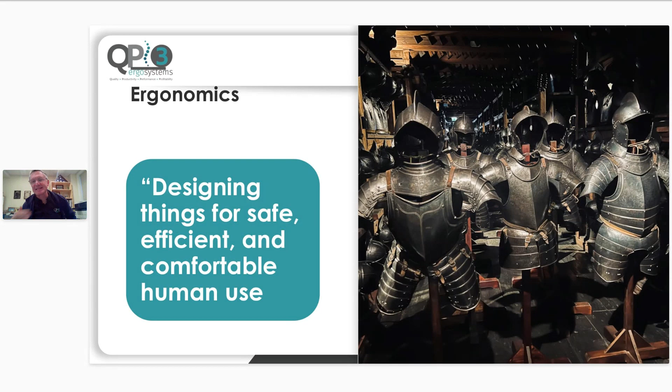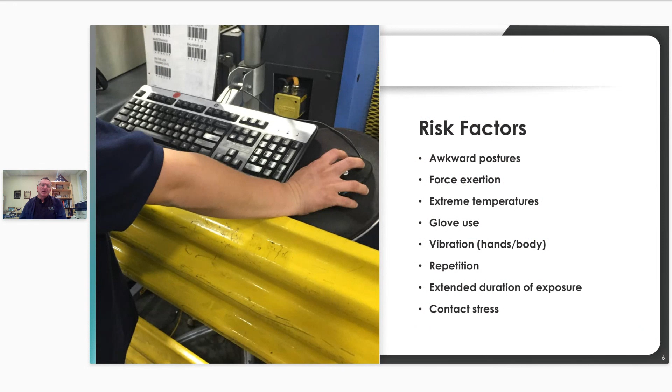But again, they were at least thinking about ergonomics and the sizes of people way back then. We'll talk a bit about risk factors. We're dealing with awkward positions, and that's one of the big challenges we're seeing with ergonomics - it's more of a posture issue. You see here, they've got extended reach, awkward posture, wrinkles in the wrist, contact stress along the edge. This is not a good setup, so we want to be concerned about this.

I like to talk about this whenever we get the chance, because the financial impact is pretty great. We look at the average case cost, about $25,000. The deductible for most people's workers' comp policies is about $250,000. So that means most ergo cases don't hit that deductible, and that comes out of the company's pockets. You got to find the money somewhere - money doesn't grow on trees. It comes out of an organization's profit margin. So if your organization has a 10% margin, you have to sell another $250,000 worth of products or services to earn the money to pay for that one claim. That's really important to keep in mind.

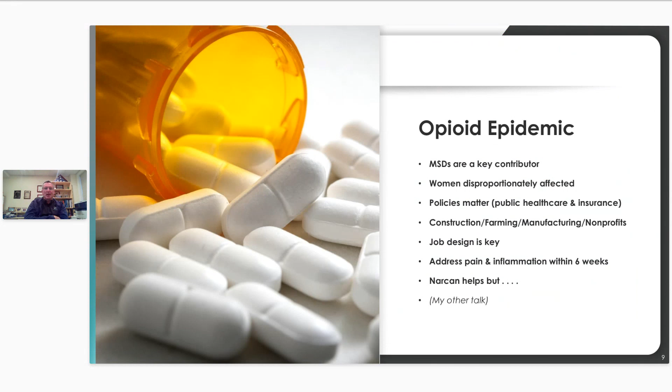If we start looking at the opioid epidemic, we see soft tissue disorders as key contributors. We see more women affected. We see public healthcare policy incentivizing healthcare providers to manage pain - they're financially incentivized, because the better the pain scores, the more money they get reimbursed. So it incentivizes healthcare providers to actually throw more painkillers at people, and that's a challenge. That's a whole other talk.

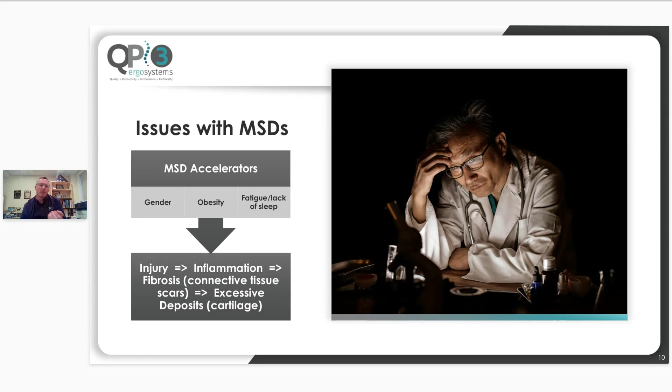We have lots of issues with MSD accelerators, such as gender, obesity, fatigue, and lack of sleep. Again, I talked earlier that women are more susceptible, and I'm not sure why that is, but what we're trying to do is protect the people. We want to get ahead of things.

Now, in the U.S., there are several ergonomics requirements, believe it or not. Federal OSHA has what's called the General Duty Clause, and that's sort of generally written, but workplaces are required to address recognized hazards - i.e. if you know people are getting hurt doing this job and it affects the shoulders, then it's a recognized hazard. You need to do something about it.

Minnesota has a new ergonomic standard that just went into effect at the first of the year. It affects healthcare facilities, warehouse distribution centers, and meatpacking and poultry processors. Warehouses and meatpacking and poultry processing are at a 100-employee threshold, but healthcare facilities don't have that 100-employee threshold, so got to make sure of that. If you're in any of those industries, let me know - we can help you out. If you're in Minnesota and have those sorts of operations, it's really important to consider.

California is a whole other world. You've got the Injury and Illness Prevention Program standard, requiring companies to conduct assessments of all claims-related incidents. So whether it's ergonomics or not, if somebody gets hurt and you're not doing an assessment, you need to be. They've also got an ergonomics program standard for general industry - it's about a page and a half.

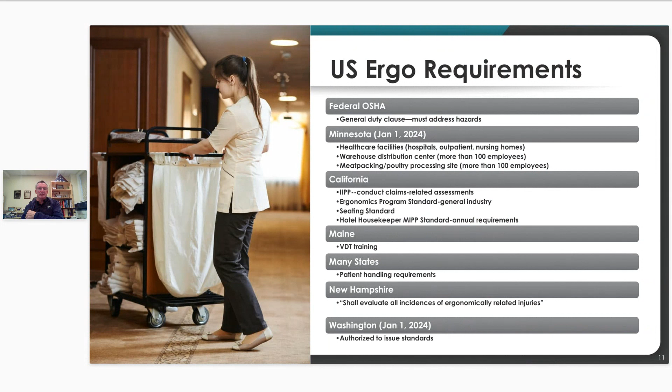But it's not just in the U.S. that we see this stuff. Brazil has ergonomics requirements, and the interesting thing is they're based on your gender and age. They also have specific material handling requirements or limitations. Mexico requires everybody to do assessments, find the risk factors, and look at material handling.

In the UK, their ergonomic standard or efforts are focused mainly on computer workstations. And the European Union - I've done a lot of work overseas - is making sure that hazard assessments of jobs are completed for all jobs, looking at safety, machine guarding, ergonomics, and industrial hygiene. I did a lot of work back in the day, in a prior life, in the EU, and there's similar requirements around the world.

Some of my coworkers said - she put it pretty well - some of my best work paid vacations. We had some time off, generally if we were doing a longer trip, and we got to explore the area. If you're ever in Sydney, make sure you go to the Museum at the Rocks. It talks about how the prisoner ships were brought in and some of that history. I'm a history buff, and it's really cool.

All right, so let's start talking about job rotation specifics. Smith in 1981 said a change in task is comparable to taking a break. Well, yes and no - we have to think about it. We're going to look into a little bit more detail.

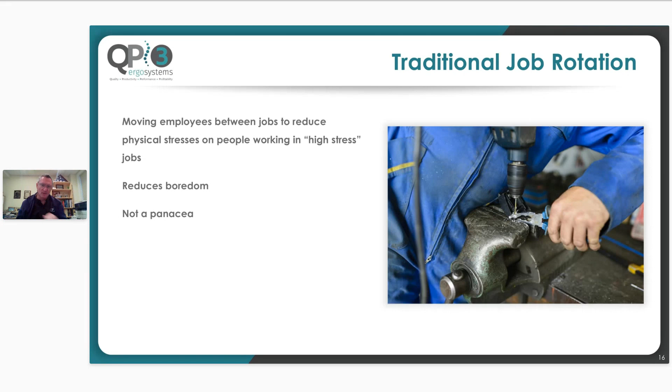The challenge is it's not a magic wand. Actually, I've been looking for that magic ergonomics wand for a long time and haven't found it. When the Harry Potter books and movies came out, I thought we were there, but no luck. Anyway, there's no magic wand.

So the challenges we see are we have to use a different part of the body if we're going to be rotating from one task to another, and we have to rotate frequently enough. Now, job rotation isn't just for physical issues, it's also for cognitive issues. So if I have a very highly visually intense task, I need to rotate a lot more frequently from a cognitive standpoint. Think about it the next time you're standing in a long line waiting to get through airport security.

Those are the screeners, a highly intense visual task, high stakes as well. You'll notice they rotate about every 30 minutes. Sometimes what we're finding from a fatigue failure standpoint, meaning wear on tissues and joints of the body, is that a high risk job can sometimes still be too high that we don't want to move somebody through it.

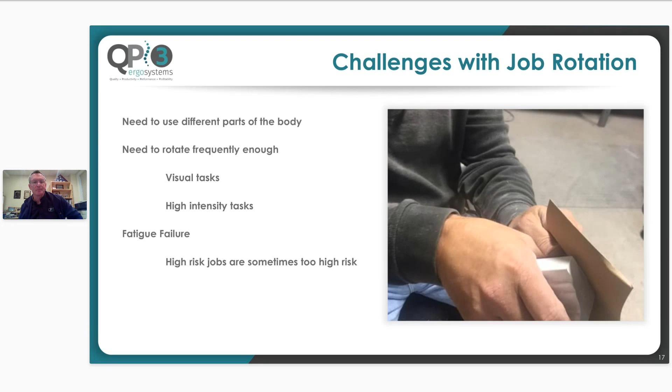Let's see if we can get this to play. There's the Tacoma Narrows disaster in the 40s. It's not playing, I was hoping to get the video to go. That's not working for us.

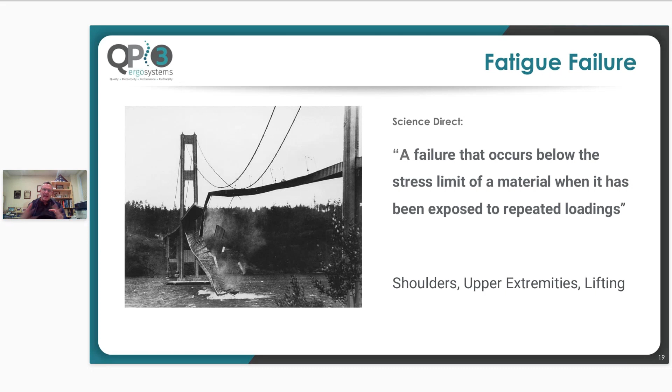We generally see this in the shoulders, upper extremities, and with lifting tasks. There are a few tools out there I've been working with that help us look at what's going on in the body. In the bridge example, we're looking at an inanimate object, but with the body, researchers were looking to see whether the human body would be subject to the same kind of fatigue failure. They did a lot of studies using lab mice, rats, etc., and then with living organisms.

The challenge with rotation is, as we talked about, rotating people from a low risk job to a high risk job. Say we have three jobs: one very high risk, one medium risk, one lower risk. We have to look at all the jobs in the cycle from a fatigue failure standpoint. The challenge is that since the damage is exponential, not linear, even though we might rotate someone from a high risk job through two lower risk jobs, at the end of the day we might still bring that person, instead of just one, into high risk for injury or illness.

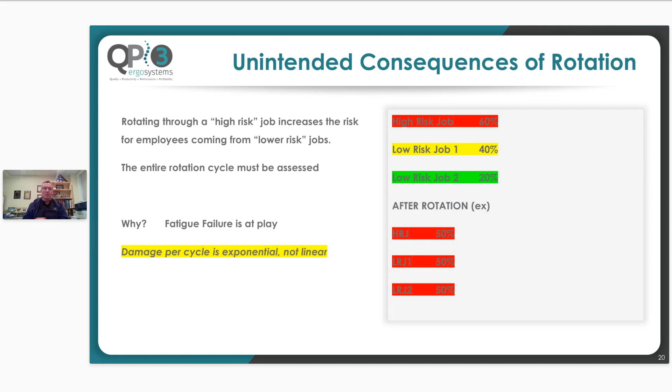That's a challenge. I think that's what a lot of folks are missing with job rotation, they think we'll just do job rotation and be done with it and be fine. No, you can't do that. You just can't use that as a panacea.

Here's some info on a job I reviewed a couple of years ago, doing a horizontal push-pull. It was about a 45-inch lever arm, reaching 45 inches to make an 11-pound push of a tote across the conveyor to a takeaway conveyor. What we found is the actual order of magnitude of risk for an injury requiring medical intervention within a year's time was over 90%.

Sometimes when I get a chance in class, I'll mock up this job and let people think about the effects on the body. What we're getting here is that extended reach, because they're pretty much laying the totes across the conveyors. Ironically, these are full totes, but in the picking operation, since it was a fulfillment job, the empty totes were being pushed onto the conveyor where they're picking by mechanical means. So they already had the technology and equipment, they just weren't using it to help once the person was done picking that tote. That was pretty fascinating, and a little frustrating as well.

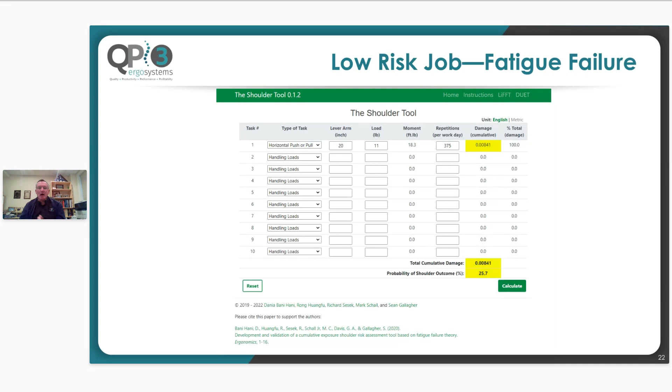So here's another horizontal push-pull job. Let's see if we've got the lever arm dropped down to 20 inches, load of 11 pounds, about 375 times. That's not a bad job, about 25% risk for injury. Then if we take another look and say, what do we do if we take that lower job, instead of 750 times for the 45-inch reach, we're dropping that down to 375.

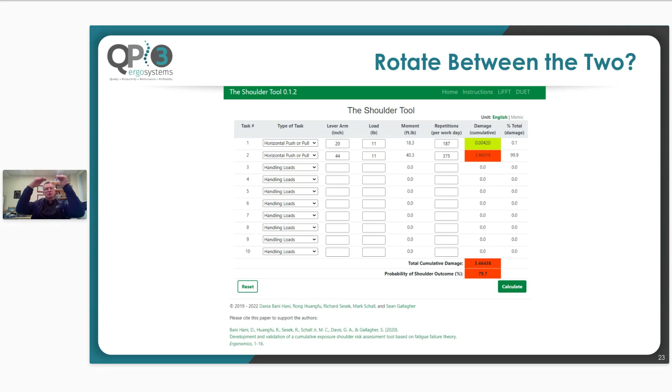And we drop that other job, there's a 25% risk. We're still at a high, almost 80% risk for an injury. So we've reduced the worst job a little bit, but we've really escalated the risk to that other lower, what used to be the lower risk job. So we've gone from having one high risk job and one low risk job to two high risk jobs. That's something we really have to be careful of.

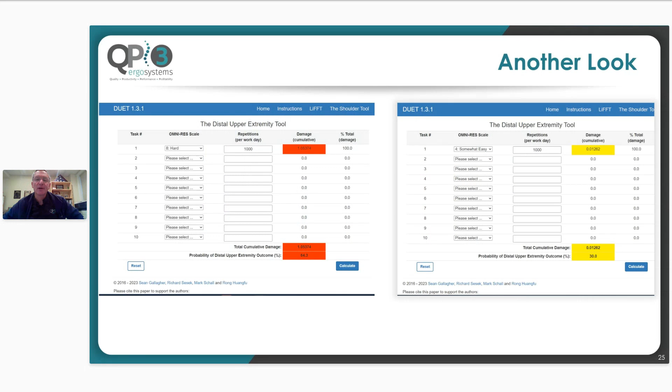So we've taken the cumulative damage again, 1,000 times a day. We're seeing that hard expression. So we've got a high risk job, that's what he was doing. And then we look at a lower risk job where it's somewhat easy, 1,000 times a day. That's pretty decent, we're in the 30% risk. But then if we say okay, we'll rotate from A to B, now again we've got both jobs high risk.

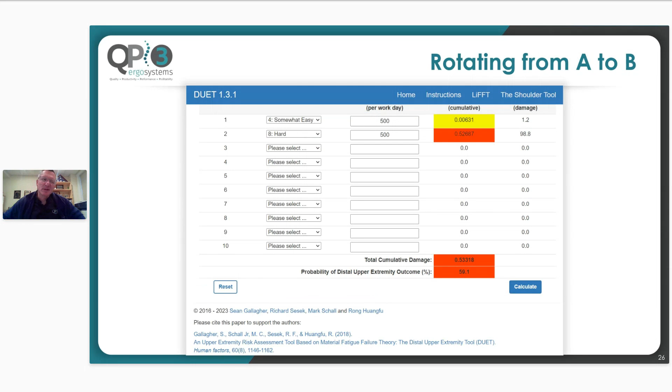So those are some, I just call them academic examples, but coming up pretty soon, this is actually real life, a project I'm in the middle of working on. Hopefully we'll wrap it up this week, but I can't really share the operations or stuff with you.